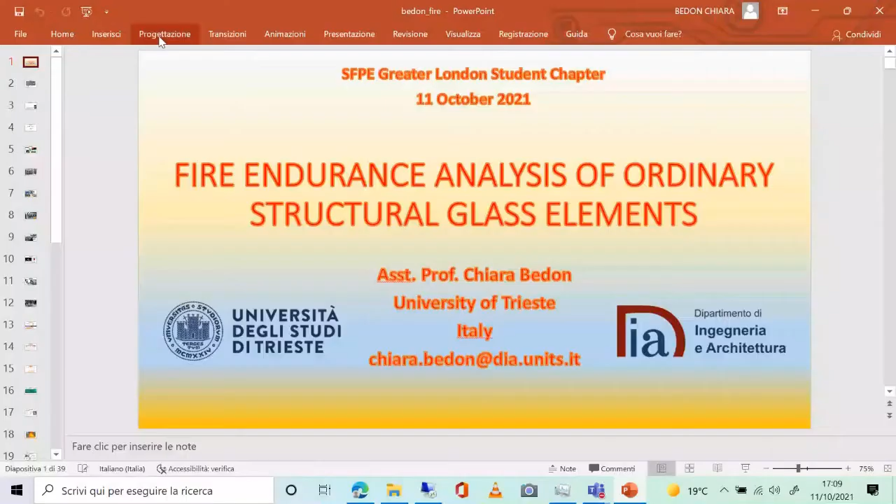So today I'm more than happy to show you some results of a research activity that is always ongoing, because we're talking not only about a new material for building and structural applications, but also a lot of loading and boundary conditions and design issues that still need to be solved. My research activity is suggested and guided by open challenges for design applications. My biggest pleasure is that some topics from my PhD activity are also part of the Italian technical document, the guideline CNR-DT 210, which we published in the same period as my PhD, something where I had the opportunity to contribute to the working team, including research funding that at the time was mostly related to buckling phenomena for glass structures.

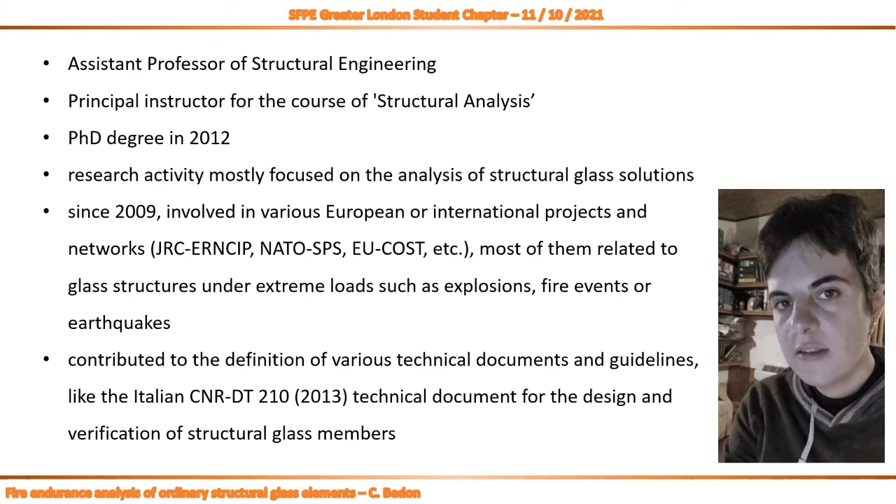Today I will show you something totally different, still related to structural glass, but with a focus on fire performance. This is something I'm taking care of at my department, but also with some colleagues who provided a big contribution to part of the results you will see in a few minutes. In particular, I want to thank my colleague Professor Christian Louter from Dresden University, because you will see in a few slides some experimental results that were handled by him.

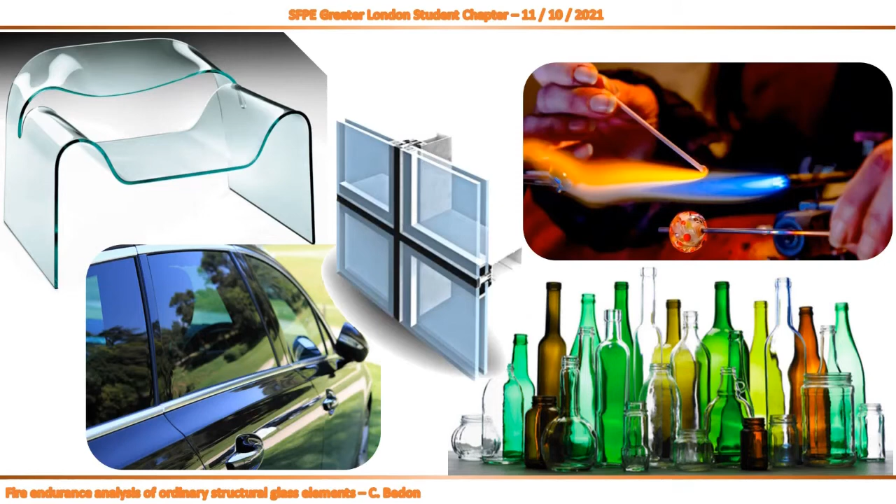So going on, let me introduce the material and also the challenges we are trying to solve at this stage of the studies. If we talk about glass, we can have in mind something totally different from our daily life applications, moving from automotive solutions, food solutions, but also, for sure, windows and facades. So the same material is used almost everywhere, especially in the building sector, where we still have a lot of open issues that need to be solved.

The basic application of glass in buildings is typically a vertical partition, a typical facade or wall, where glass panels provide a physical separation of indoor and outdoor spaces. But from a structural point of view, we also ask these same glass panels to provide appropriate safety levels to people, since they are a physical barrier that must behave properly against wind pressure, crowd pressure, and impact.

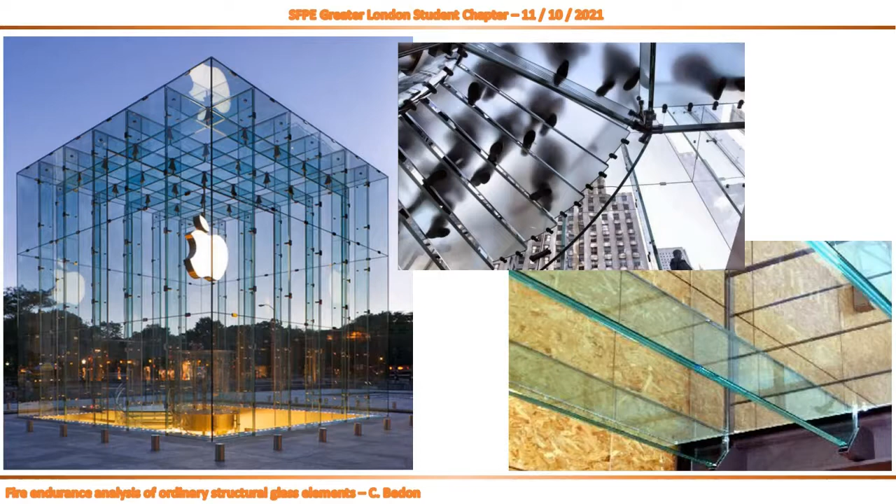Let me say something else about this material in buildings. Especially in the last 10 years, we've seen an increasing number of applications of load-bearing structural glass members for totally different solutions, including stairs and roofs, not only vertical partitions.

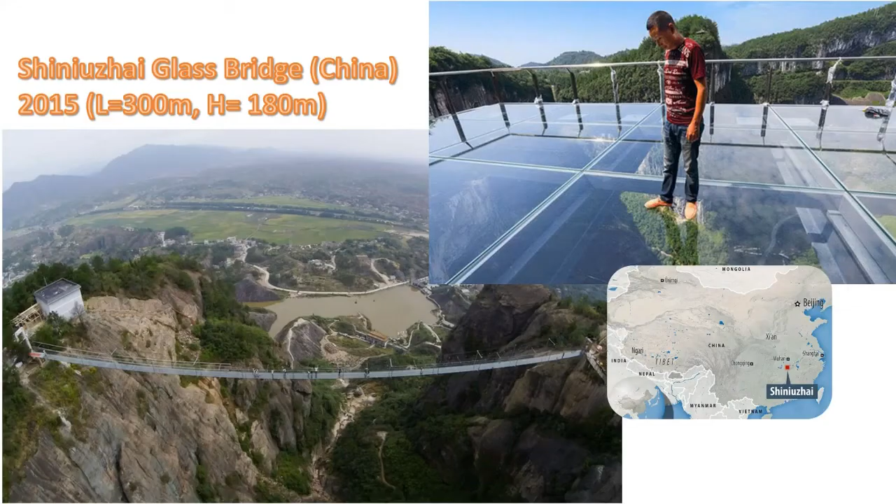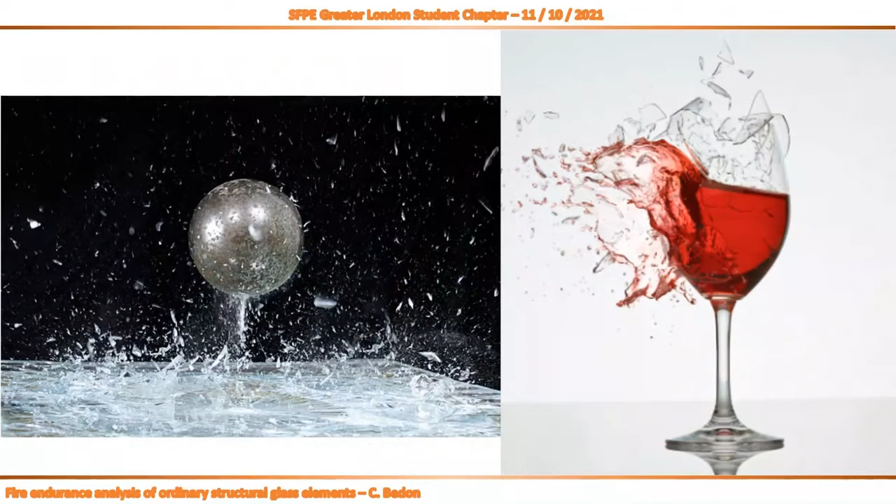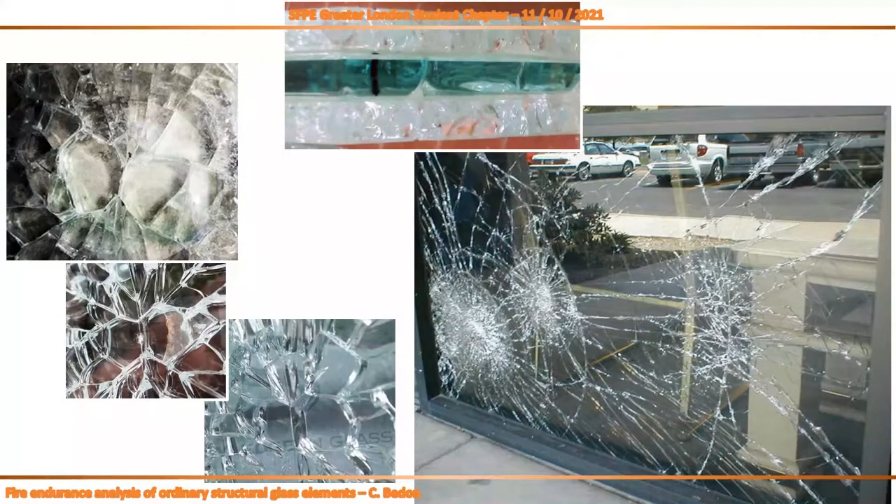While we know this material is not safe for daily life objects, we cannot accept any kind of risk for buildings and load-bearing members. Here you can see some typical examples of fracture. This may derive from extreme design actions, but also from other reasons I'll skip in this presentation. You will probably have in mind something like this: a lot of shards and fragments, which are the first reason of risk for people, especially under impact.

This is everything to introduce this construction material from a simple mechanical point of view. In few words, we can say we are talking about a linear elastic construction material with very brittle behavior in tension. So it's a solution that is not safe for building use on its own, and we typically design it in terms of stress peaks and deflection limits.

Something that seems very simple in words, and basically related to linear elastic considerations, where the first important parameter for us is the elastic modulus of glass—about 70 gigapascals, like aluminium—and the tensile resistance. Everything else can be solved easily, even under different loading and boundary configurations.

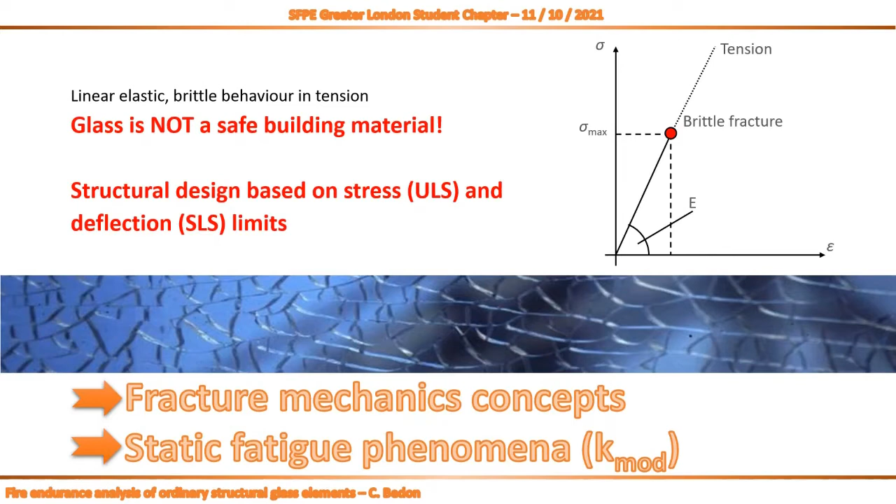Here you have a summary of basic mechanical properties that we should keep into account for simple mechanical and structural design considerations.

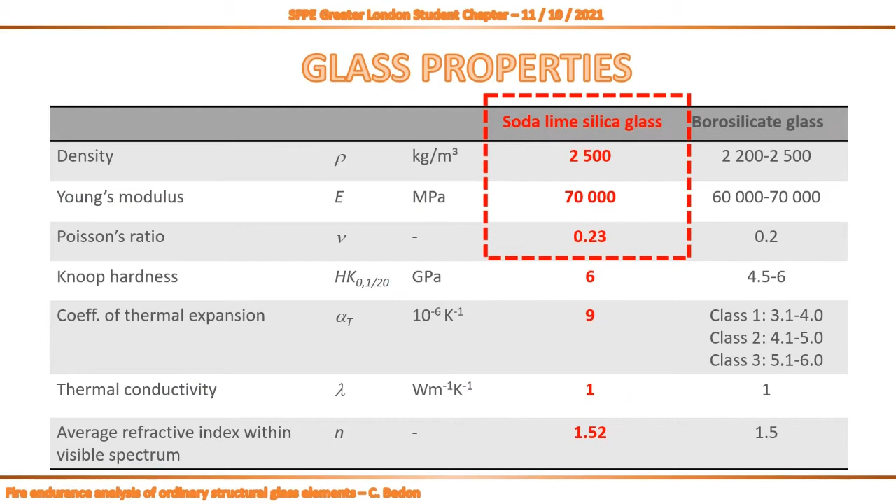But we should also mention, before moving to fire, that we can take advantage of heating and cooling stages during the production phase. We know glass is very brittle in tension, but we can also improve its basic mechanical features.

You will probably hear about annealed glass, the basic solution, where tensile resistance is around 45 megapascals. We can apply a partial pre-stress stage and increase this tensile resistance up to 70 megapascals. The best solution is fully tempered glass, where the tensile resistance is about 3 times that of the simple annealed version.

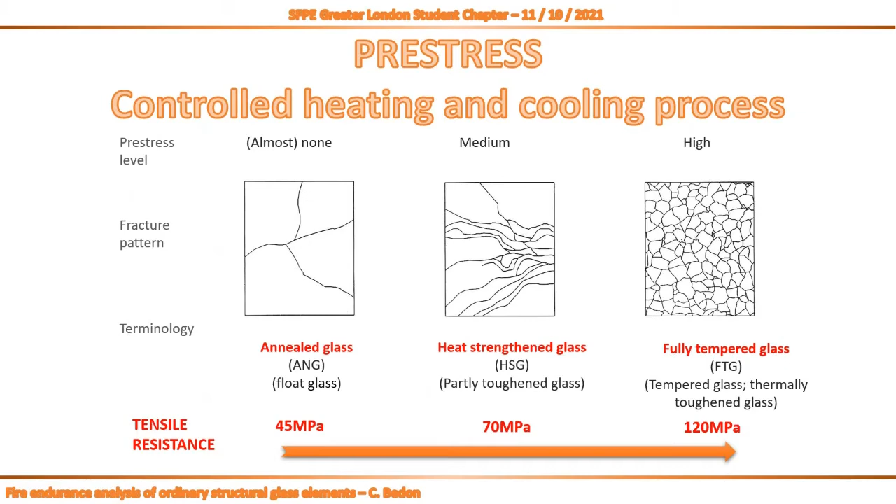This is everything we can manage and adapt to different design considerations, even assuming we will never use a simple monolithic glass layer, but at least two bonded glass layers, taking advantage of viscoelastic bonding foils able to provide a thicker and much safer cross-section for our structural applications.

Our attention will be given, let's say, no more to glass shards and fragments, because we are using laminated safety glass just for this goal.

But we should be aware that the bonding films are strongly sensitive to several conditions, like time, loading, temperature, humidity, and in general, aging. In this chart, you can easily see what happens to the elastic stiffness of our bonding layers.

The typical solutions in use are PVB or SentryGlas. As a function of temperature, you can see that the nominal value in design conditions is strongly affected by external temperature, so operational temperature. But this is not the only influencing parameter.

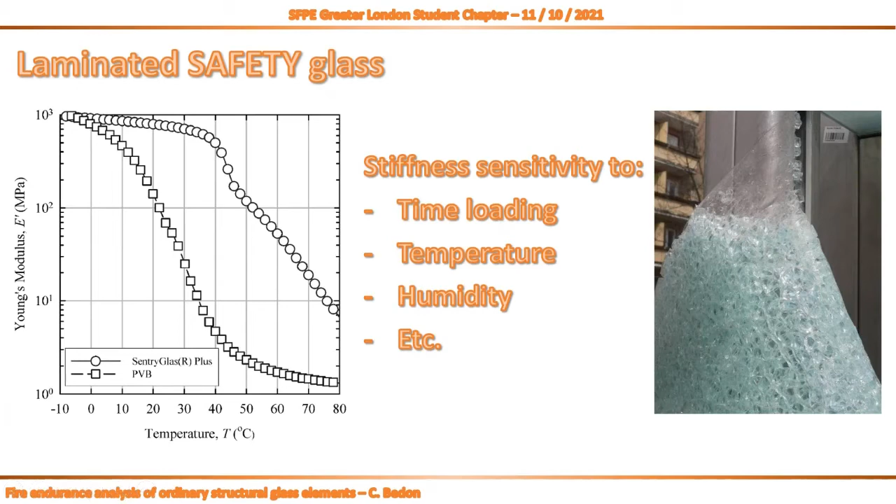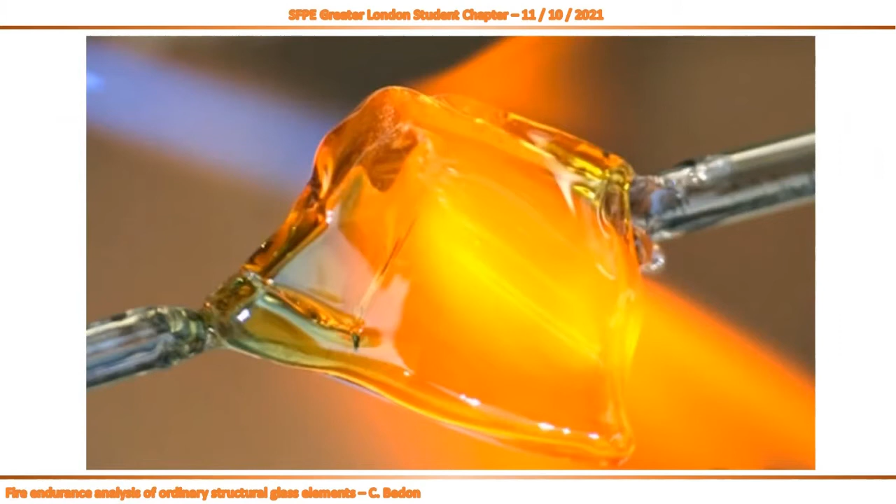We will see that a combination of unsafe operational conditions can affect the shear stiffness of these bonding foils. But more or less, we have the instruments and tools to take care of this aspect and design structural glass at room temperature for most of the boundary conditions of interest.

Well, we still have a problem when we talk about fire, for example, and when we talk about fire for traditional glass. I mean, glass that we can use for load-bearing components in buildings - we know that it's a brittle in tension material, but has nothing to do with fire.

This just introduces the concept, because maybe you have already experienced this. You can find on the market also a special glass which is specifically proposed for fire applications - more or less the same material with some modifications just to ensure a very slow temperature degradation and temperature distribution of the degradation in the thickness of glass.

In most cases, you will need to take care about glass elements that are characterized by large dimensions but a very small thickness. So something that will represent the critical aspect for design considerations.

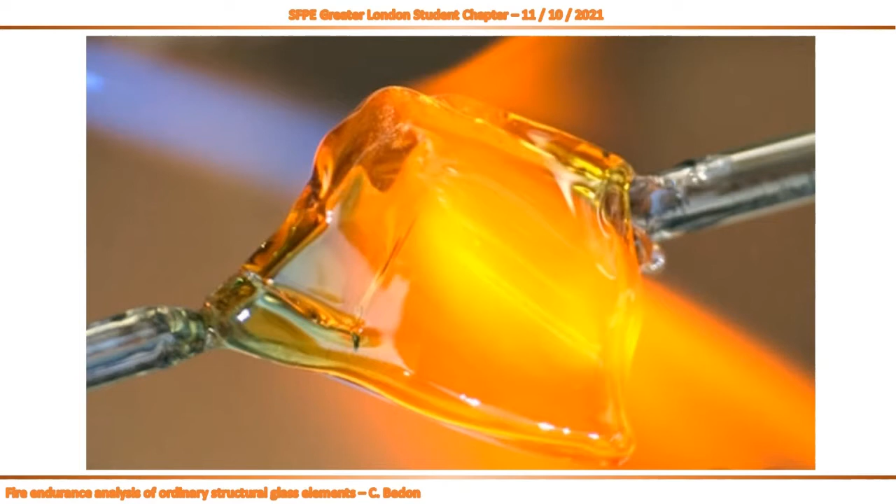So why are fire considerations and fire resistance discussion important for this brittle in tension material? It is very important because of the intrinsic material properties. Just imagine that we are talking about load-bearing elements that we are able to design against mechanical loads, but in case of fire are asked to sustain a combination of mechanical loads and also heating exposure.

So where is the problem for traditional glass? The problem is not only related to very limited tensile resistance, as we discussed a few minutes ago, but also to the sensitivity of its elastic modulus to high temperature.

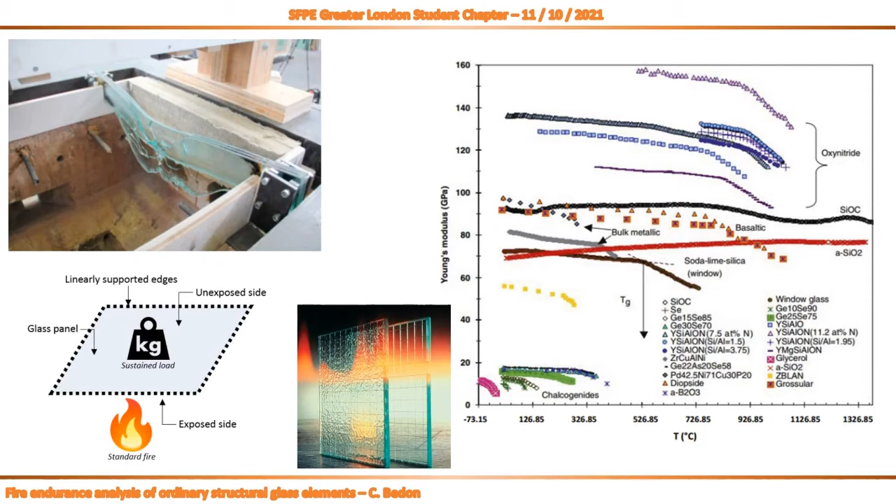So part of the research studies that I'm showing today are taken from some published papers, but keep in mind that this research project is still ongoing, and so we need additional efforts to find a final solution.

In the literature, you can also find some examples of fire experiments on different glass solutions, in which you can see here a simple glass beam under in-plane bending and heating exposure on the side. On the right picture, you can see the setup of a fire experiment carried out on a beam, again under in-plane bending, with the web made of glass and top and bottom regions made of timber, so a timber-glass solution.

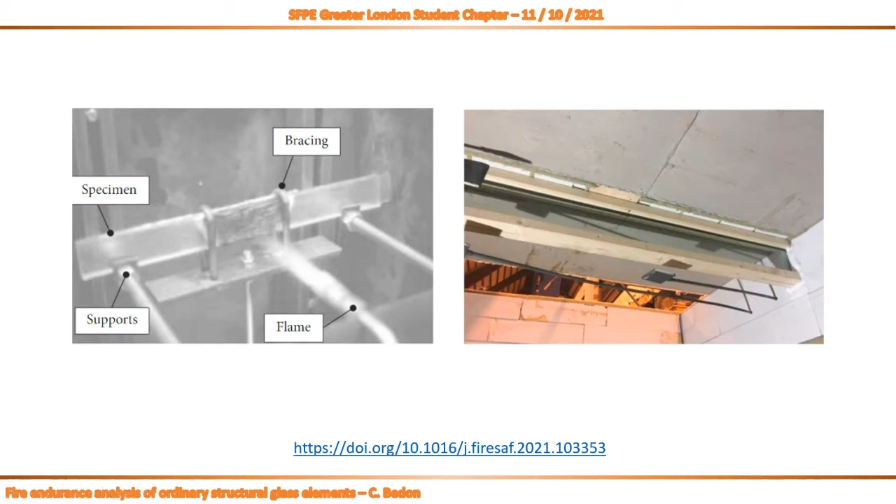And today specifically, I will use the experimental feedback from these laminated glass beams under fire just to show you some numerical tips. So if you need some additional data and details, you can ask me, or you can find them in this publication.

Another important aspect, though I won't cover it today, is the orientation of our thin glass members compared to mechanical loads and fire. We discussed a small thickness compared to the global size, and you can see this easily from this example: we have a thickness composed of 3 glass layers for the laminated section, which is very small compared to the total span.

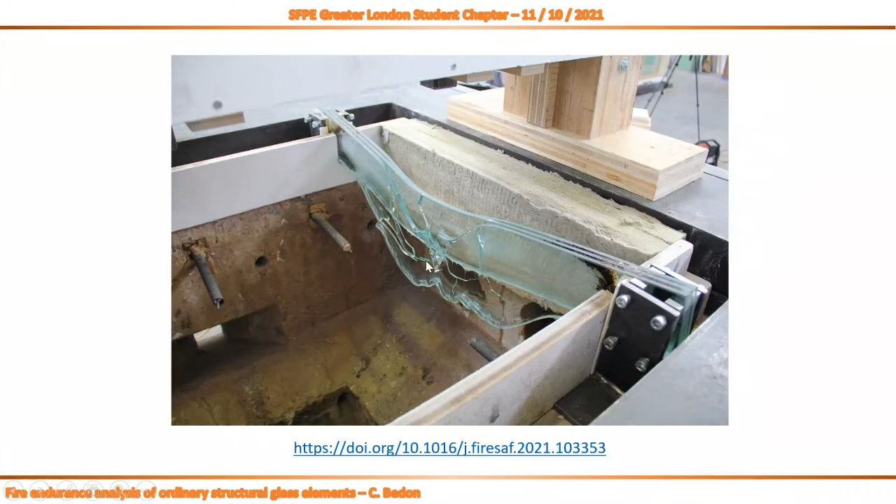Under fire, this means we can take advantage of the bending axis for this composite section and get the best performance parameters from a mechanical point of view. This is very important. Otherwise, what happens when our glass element is exposed to mechanical loads on top and fire on the bottom? We get a very thin thickness compared to the bending deformations expected from mechanical and thermal loads. The behavior will be totally different, and you can expect the performance and residual capacity of this solution to be much lower than the in-plane bending solution.

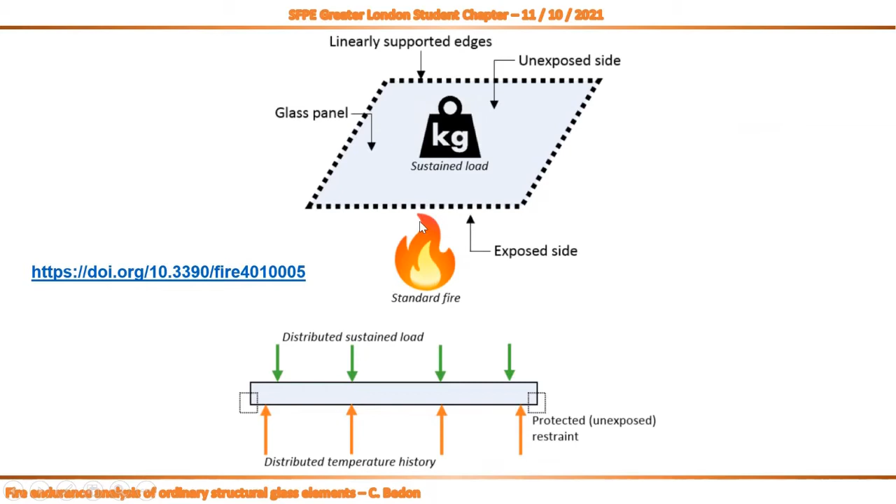It seems easy to solve because we know the mechanical properties of materials and how fire spreads and distributes over time. So what else do we need? You'll see it's not so simple to draw general conclusions, especially because the fire performance of structural glass members, even for simple mechanical systems, can be very different compared to other constructional materials.

So what we tried to do was adapt conventional performance indicators and limits to this new building material. In doing so, we needed to introduce an insulation layer—the layer you see in yellow just protects the boundary regions—so we focused at this stage on the central portion of the beam, which was directly exposed to fire.

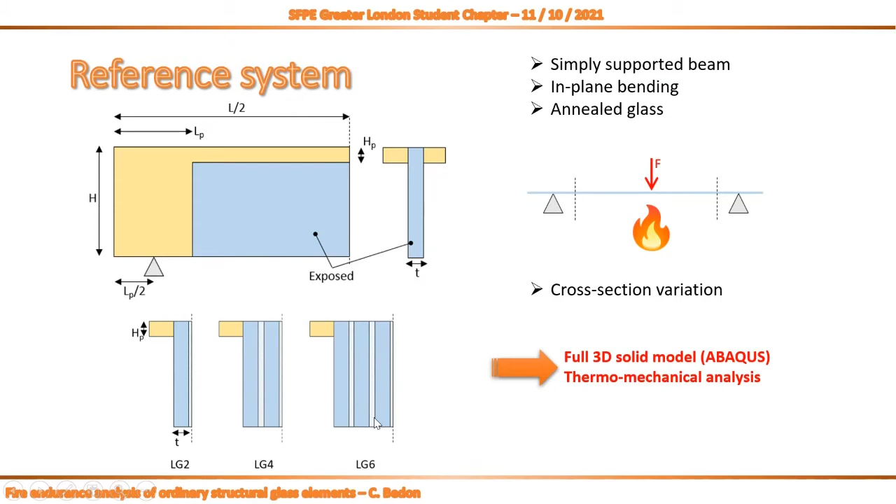Through the parametric study, we explored the in-plane bending response under a combination of mechanical loads and heating exposure. We also tried changing the mechanical properties of the resistant cross-section, moving from the monolithic solution to laminated solutions with 2, 4, or up to 6 glass layers, just to check the effect of these geometrical variations.

As I mentioned, we considered performance indicators typical of structural beams under fire conditions: the deformation rate, and in this specific case, the maximum stresses in the glass elements, to check the worst combination of mechanical and thermal loads in terms of possible fracture or melting of the material.

On one side, we're talking about a structural material known for its tensile brittle behavior—at failure, glass cracks in shards. But this isn't true under fire conditions. So where do we move, or which direction do we take, when discussing the fire performance and capacity of these members?

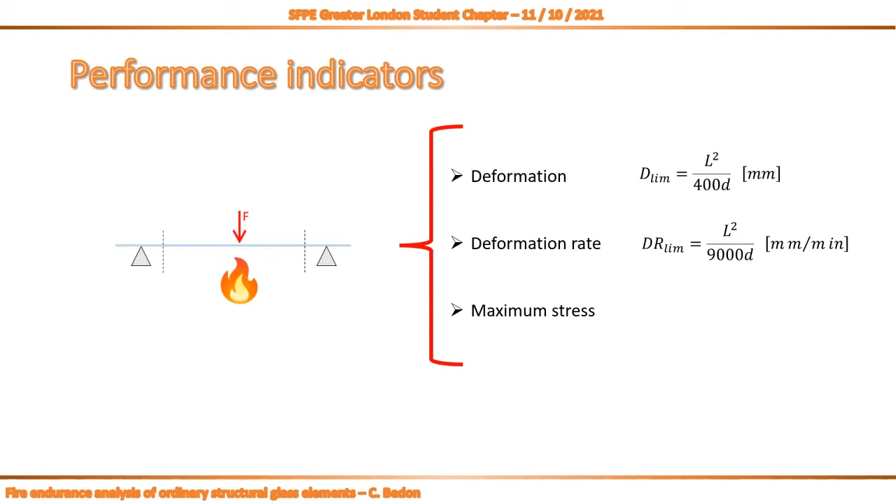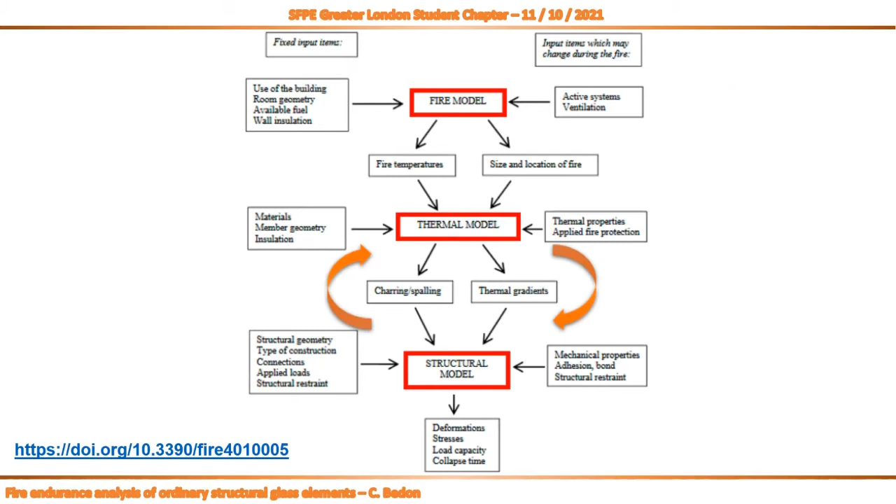Everything in this study was carried out with the support of three-dimensional numerical models, exploring the combination of thermal and mechanical effects—able to include the effects of Young's modulus degradation with temperature, and everything related to material modification over time and temperature due to fire.

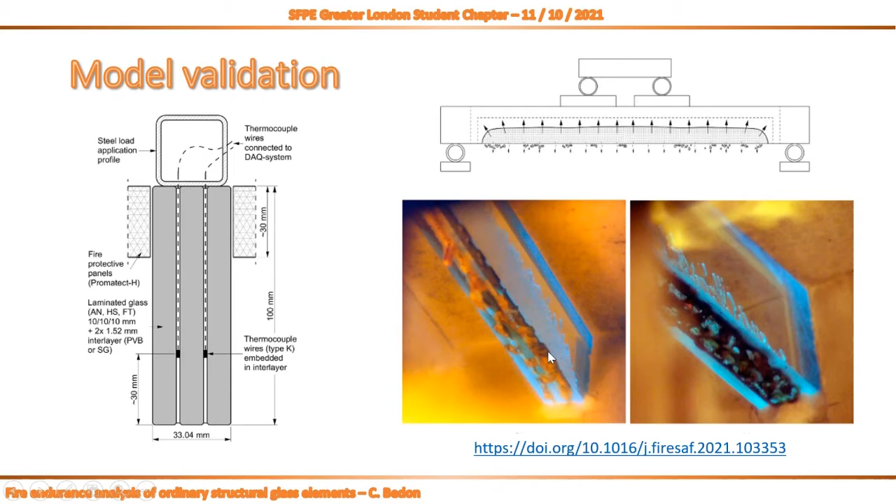For the numerical study, we did take advantage of the experiments on full-size beams, but also of some literature data related to material properties. First of all, the Young modulus and its sensitivity to temperature, but also some important parameters that usually we can skip for mechanical considerations in cold conditions.

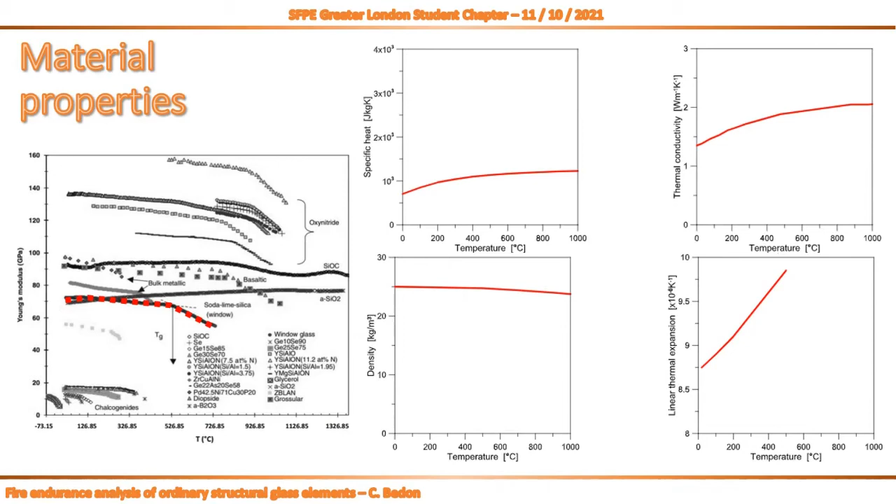So the variation with temperature of specific heat, thermal conductivity, linear thermal expansion, and density. Everything was used as a basic input to study the deflection trend and deflection rate trend of these simply supported beams under a combination of sustained mechanical loads and heating from the bottom.

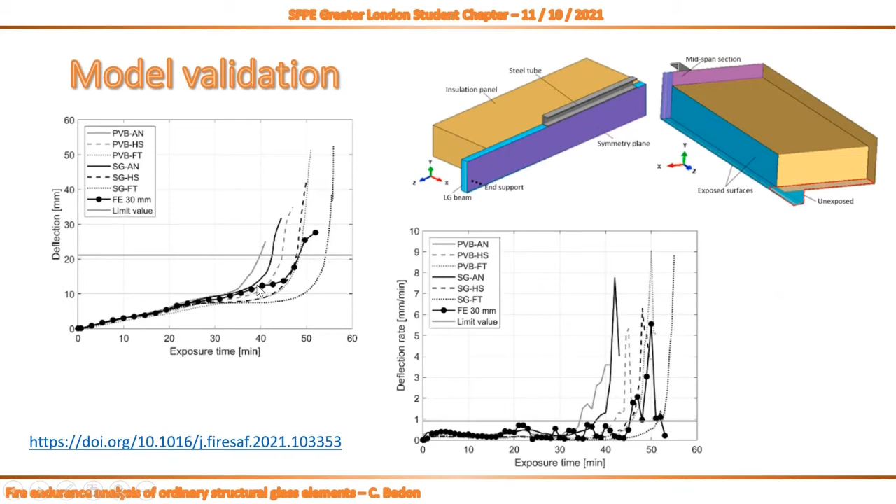If we look more in detail to the fire performance of these beams, what happens in fact? It happens that the configuration is totally different from our design bending considerations in cold conditions.

So just imagine what happens if you take the beam in a simply supported setup with a vertical load at the mid-span section. For sure, you will accept that we are going to find maximum tensile stresses at the bottom edge and compression at the top.

This is true in cold conditions, but totally different in fire conditions, where we have a heating source and an increase in temperature over the time of analysis. The reason is just related to the degradation of Young modulus with temperature, something that we can easily justify in the form of bending stiffness modification as a function of temperature, so exposure time, and for sure we can associate to it a transition, migration of stress peaks to other regions of our beam.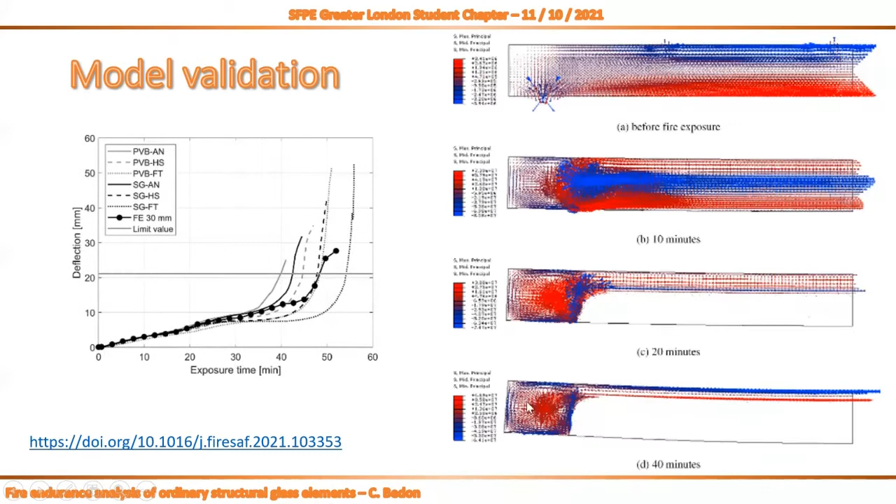So what happens if we take into account the three performance indicators, and we start from maximum stress. For sure, it happens that we cannot expect anymore that tensile stress peaks are representative of the bending behavior at the bottom edge of the mid-span section. This is something that we can do in cold conditions only.

But for sure, if you look at the other control points, P2 and P3, you will see that our tensile resistance is first exceeded compared to P1, just because of the modification of Young modulus and so modification of bending stiffness.

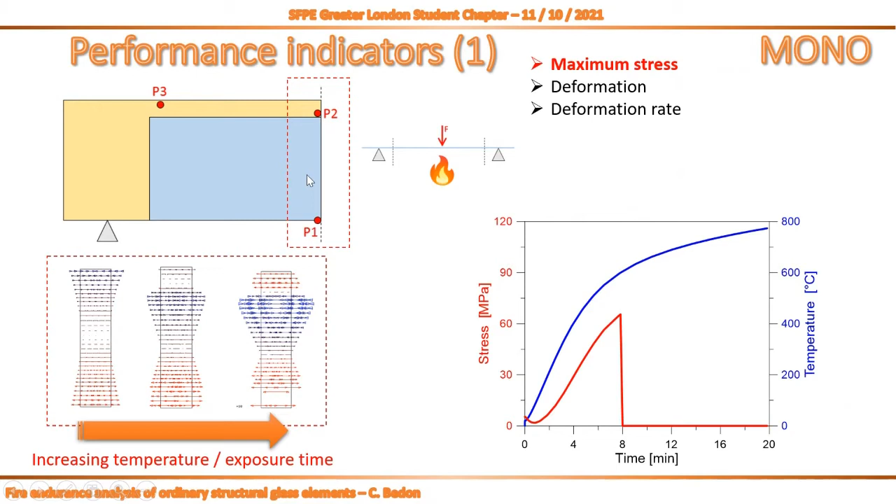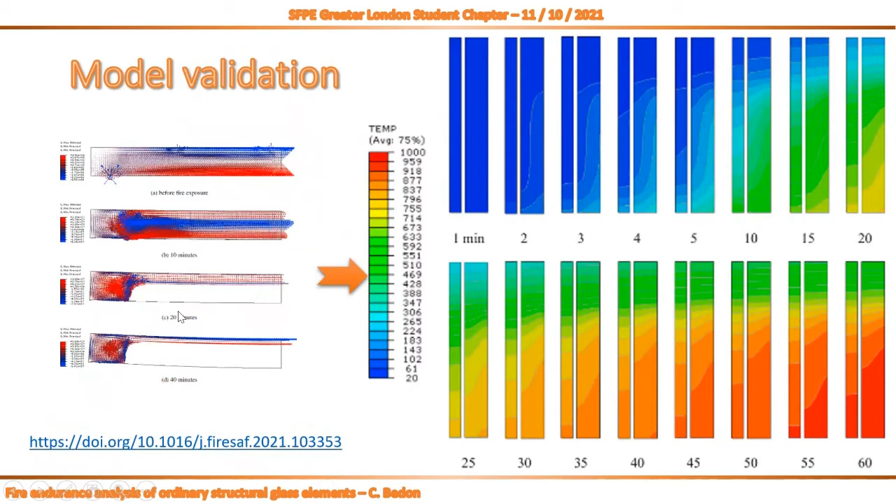Let's try to check the fire performance in terms of deformation and no more maximum stresses. Our reference is the conventional deformation limit that we can find in standards for simply supported beams in fire conditions.

What happens when we try to check this failure limit against different magnitudes of vertical load in fire? It happens more or less that the failure condition is simultaneous for all of them. This means that the mechanical load has a very small effect compared to fire if we want to apply a conventional deformation limit to our beams. Just imagine that we are talking about 8.7 or 8.8 minutes of exposure capacity, which is very big compared to the stress check, where our reference was in the order of 2 to 5 minutes of exposure.

So let's try to check what happens in terms of deformation rate and no more deformation only. Also in this case, we take a reference limit value from standards. What happens again is that we cannot see strong modifications in the deformation rate as a function of exposure time, even when we did increase the mechanical load at midspan.

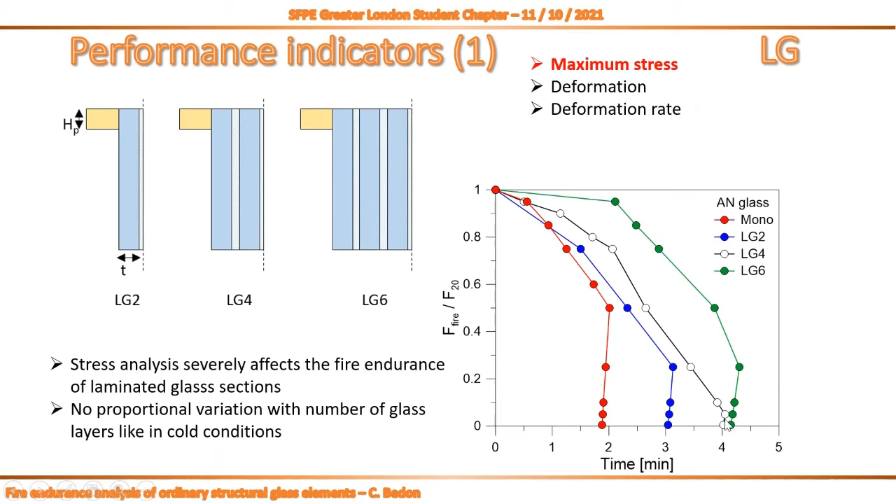And this is true especially when we have a very big mechanical load for the section to verify. So a mechanical load which gives us a tensile stress in the bottom very close to the resistance of the basic material in combination with fire. For this reason, you can see that some of the dots are overlapped. For example, LG4 and LG6 are mostly identical in presence of fire only because F equal to 0. This means that the effect of bending stiffness modification due to temperature only is so strong, even for 4 or 6 glass layers, that our maximum stress peaks are still related to the region in the top corner, like in these contour plots.

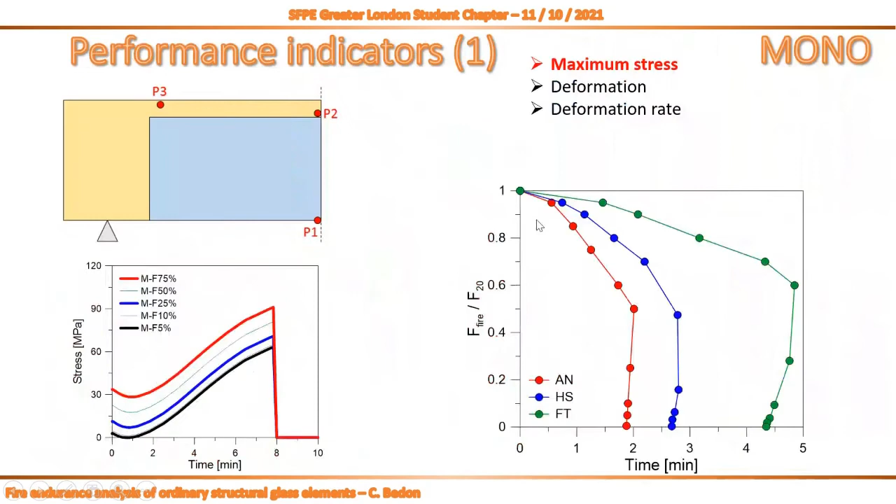This is something totally different from cold analysis. But you will also recognize that it is a complex problem to solve, because we can no more take into account only mechanical aspects of this new material for buildings, but the specific combination of these mechanical properties and the intrinsic features of glass material together with its modification with temperature as it happens in fire conditions.

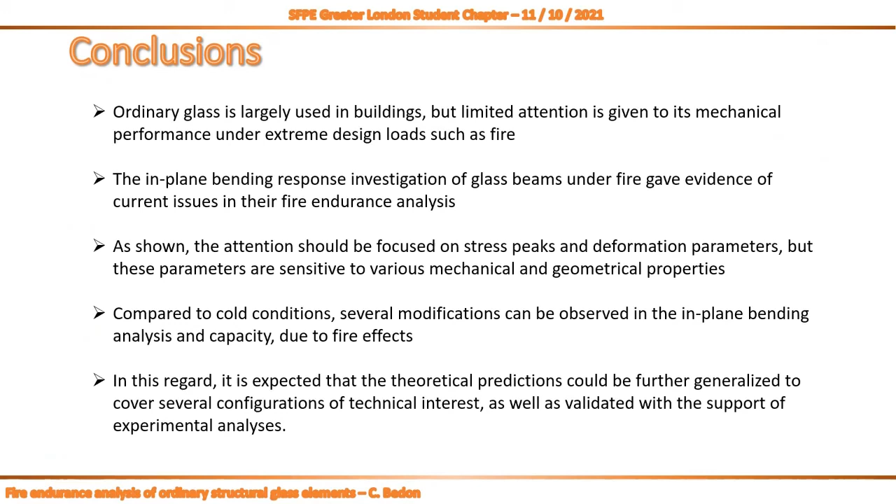So for sure, we did explore today only some aspects of this complex behavior, but I think we have more or less a clear way how to go on, especially with the support of experimental results that nowadays are increasing in the literature for this specific material and application. The most important aspect at this stage is that we cannot draw general conclusions that are extended from designing cold conditions only, and for sure this kind of research project will allow us to develop some simplified but more general tools and concepts to guide designers in this new material and new applications for buildings.

So at this stage, I would like to thank you for the attention, and I hope you will find this kind of discussion interesting.